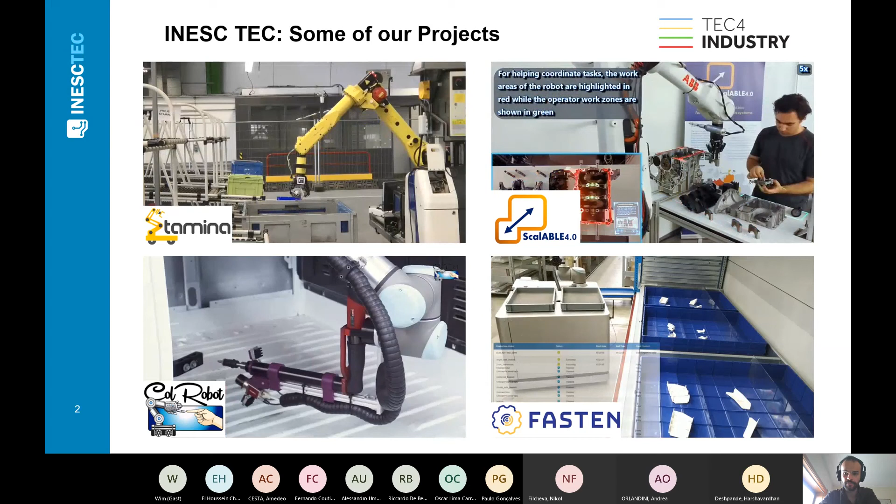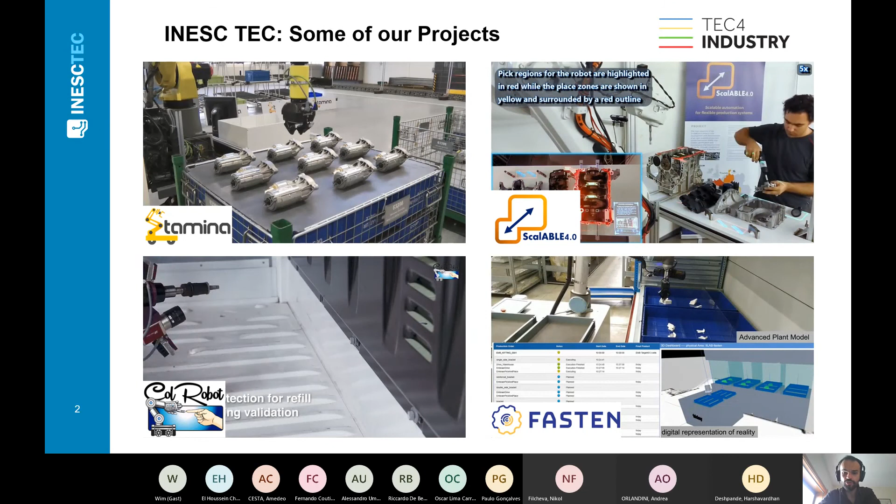Throughout the years, as I mentioned, we have worked in collaboration with the automotive sector mostly, and also recently with the aerospace sector to develop automation and robotic systems, specifically mobile manipulators to perform either manufacturing operations or intralogistics tasks within European manufacturers of these industrial sectors.

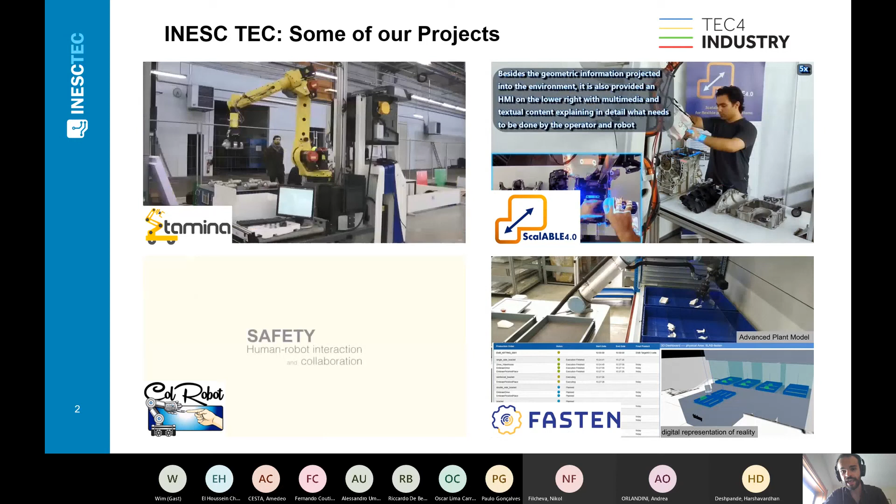And we also have put a little bit of an effort in the last few years into human-robot collaboration, and here in the videos that is hopefully being showcased in the presentation, you can see two examples of this.

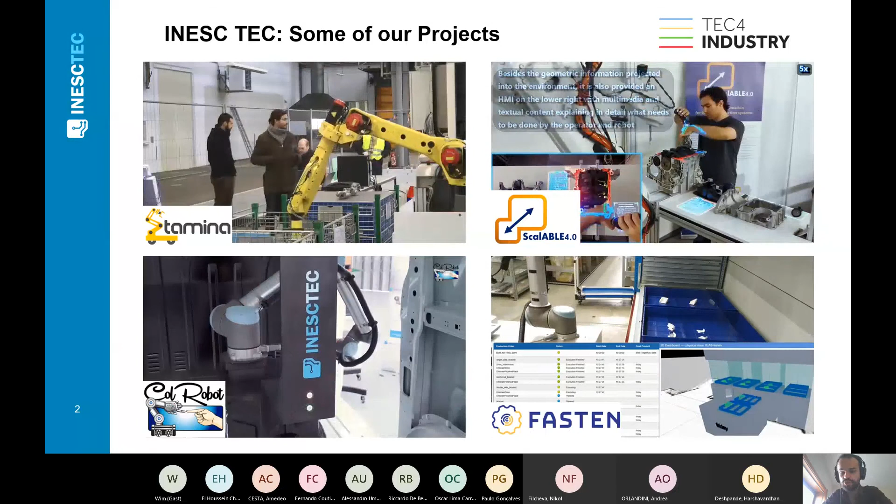On the top, we can see the Scalable project, where we developed flexible automation and robotic solutions for the automotive sector, in concrete Peugeot, Citroën, and a company here in Portugal, Simoldes.

And here in the bottom left part, we have a project which we developed for Renault in France. So it was basically a mobile manipulator to provide these assistive tasks to operators within the insides of a vehicle.

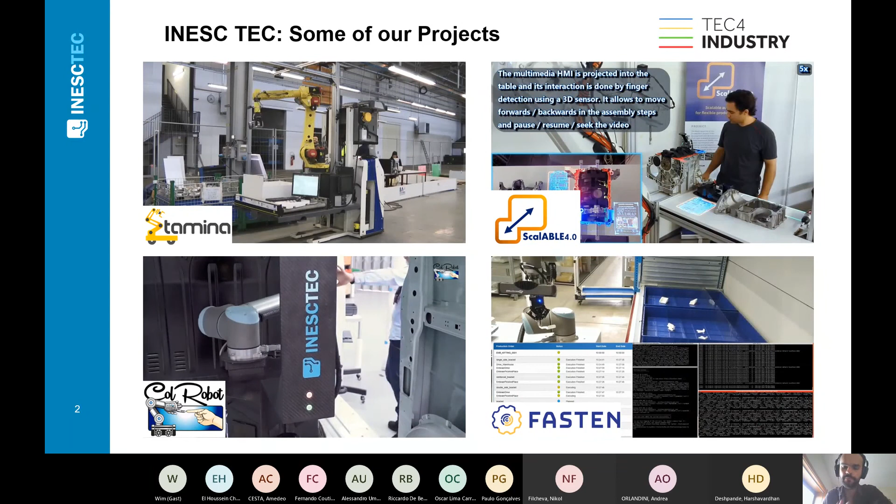All of these videos and all of these projects that I presented here have the same feature of actually featuring our ROS-CODESYS bridge, either for establishing communication between the ROS ecosystem and some kind of hardware which only spoke automation languages, or to even integrate the robots with the automation production line. And I will get to particular details in a little bit.

So going into a little bit more of the background for this development of the ROS-CODESYS bridge. So the challenge that we face as a ROS developer was the fact that we found out that many times it was time-consuming for us to develop or integrate industrial communication protocols within ROS.

Sure enough, there is already some effort and some very valuable tools within even the ROS Industrial Consortium ecosystem to provide communications with field buses and automation protocols, but we believe that there could be a more systematic way and a more efficient way to perform this kind of connectivity.

And thus the ROS-CODESYS bridge started initially as a master thesis project, but then it evolved to being this funded ROSIN initiative. And the solution here revolves around a shared memory interface that enables the communication between ROS and CODESYS, which is a soft PLC application that can then be used kind of like a relay or a middleware between the robotic world and the automation world.

So in other words, CODESYS could be responsible for communicating in field buses, so EtherCAT, CAN-open, Modbus, and so on, but also implementing connectivity and interoperability with higher level manufacturing systems, such as the features provided by, for example, OPC UA. And all of these types of communications were communications that we explored throughout the project.

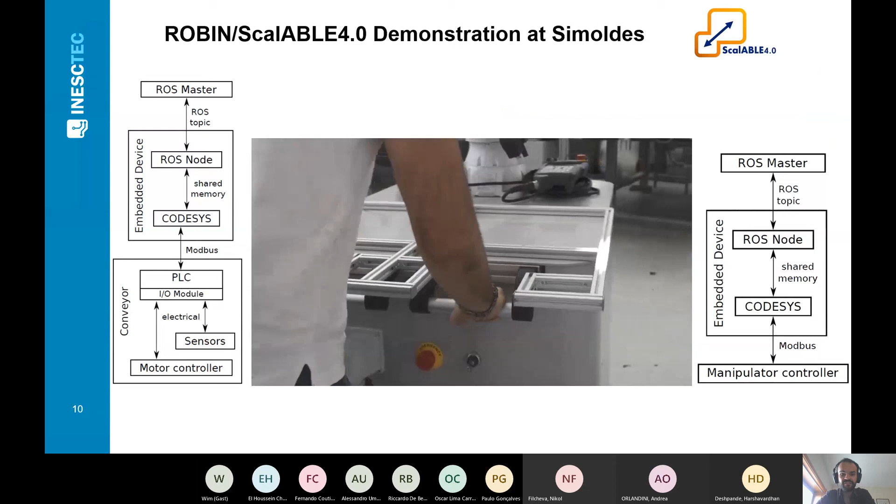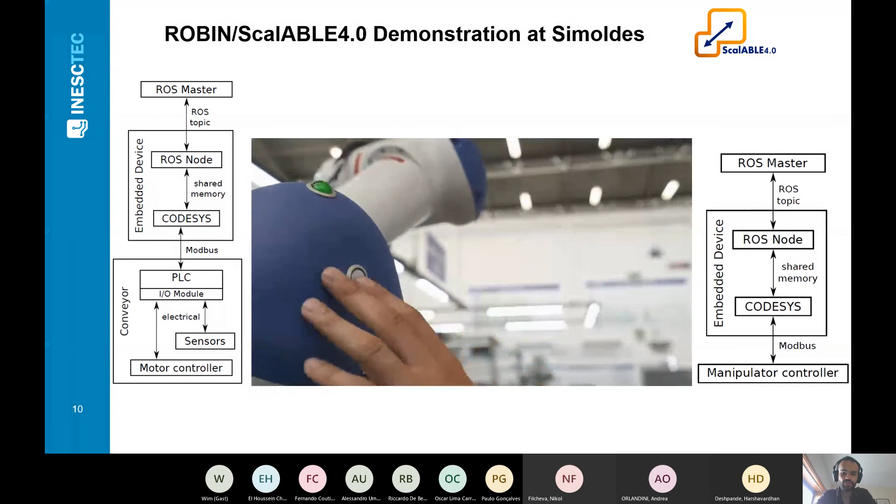Finally, here on this slide, I have a video showcasing an example of application of this software in one of our projects, specifically the Scalable 4.0 European project, which finished a few weeks ago. This demonstration was recorded in the factory with the actual Scalable 4.0 robot a few months ago.

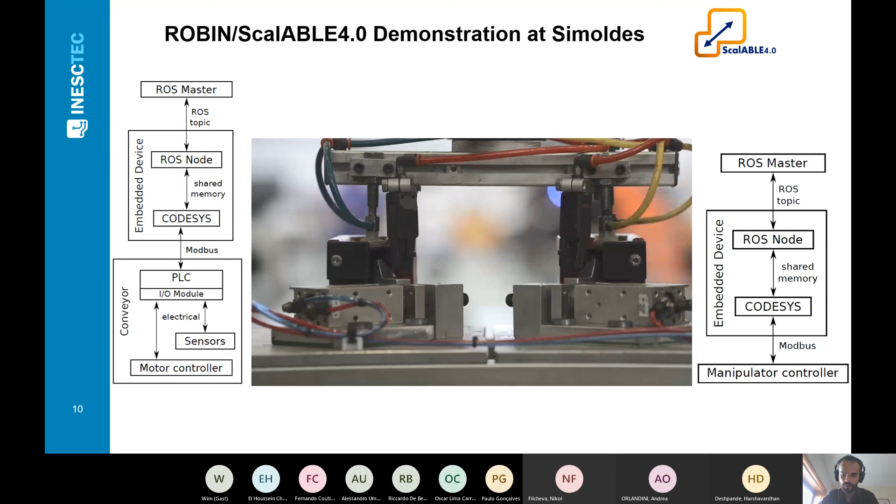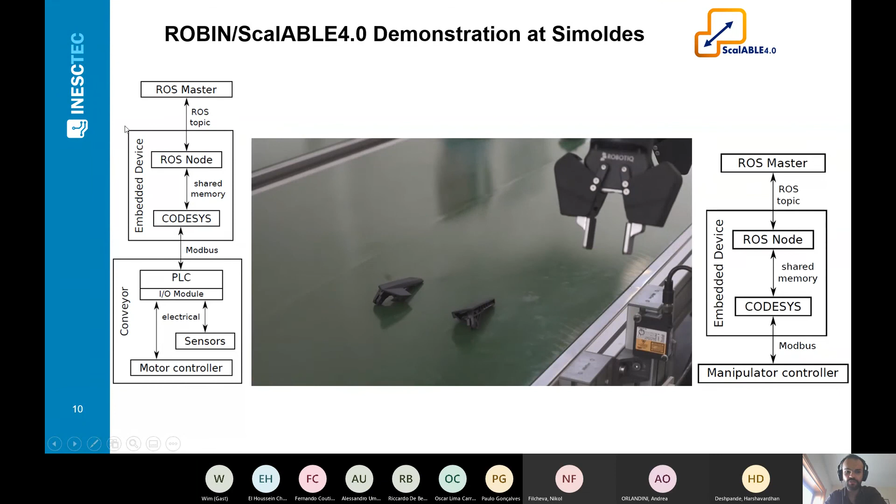We are using the ROS-CODESYS bridge for two dedicated, separate communication interfaces. The first one I want to highlight is pictured here on the left side of the image, and is related to the communication between the ROS ecosystem and the conveyor PLC.

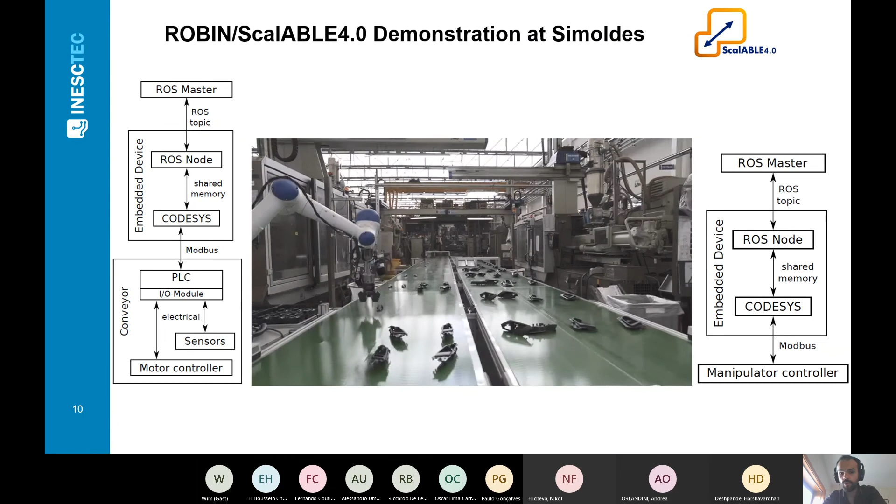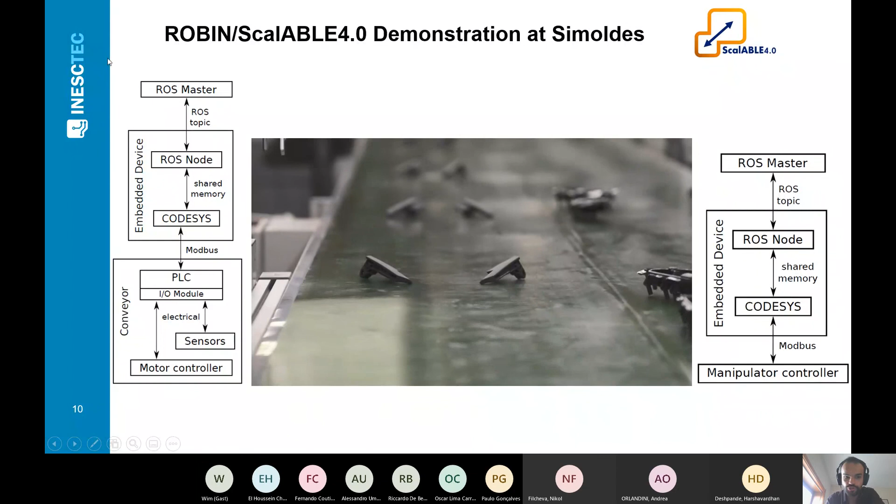In the factory, we have this dedicated multi-product assembly line where we have sensors, pictured a few seconds ago in the video, which are basically laser sensors that detect the positioning of the objects to be picked and inform the robot, through this ROS-CODESYS software implementation, that there is a given type of part at this position.

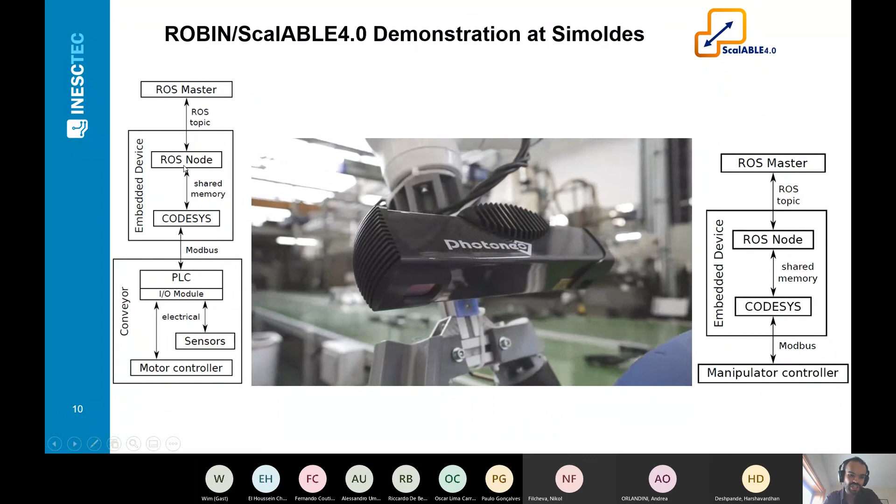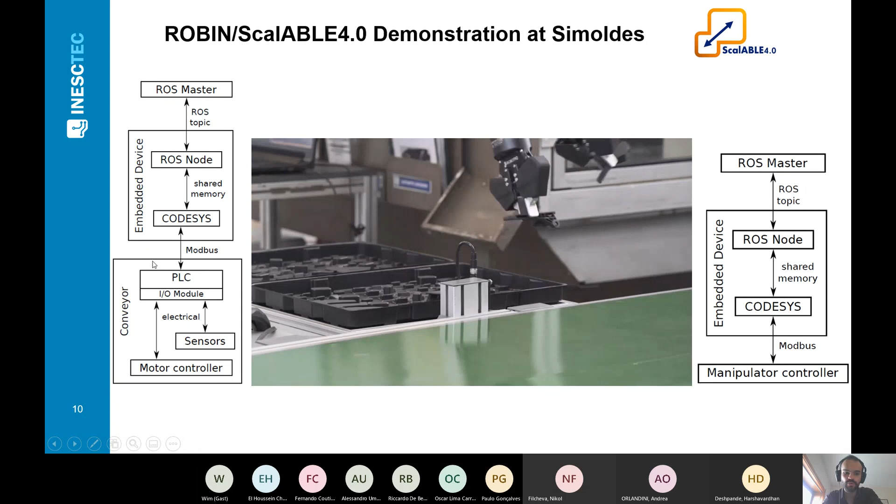The way we do this is to enable communication between the BeagleBone Black, running the ROS node generated automatically from our CODESYS project, and having this CODESYS project communicate via Modbus with the conveyor PLC, which has its own project reading the sensors and actuating the controller for the motor that moves the conveyor belt.

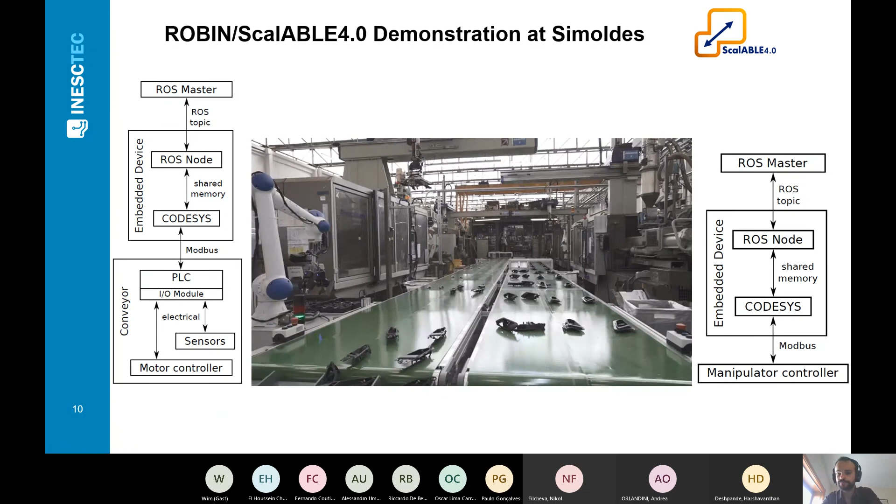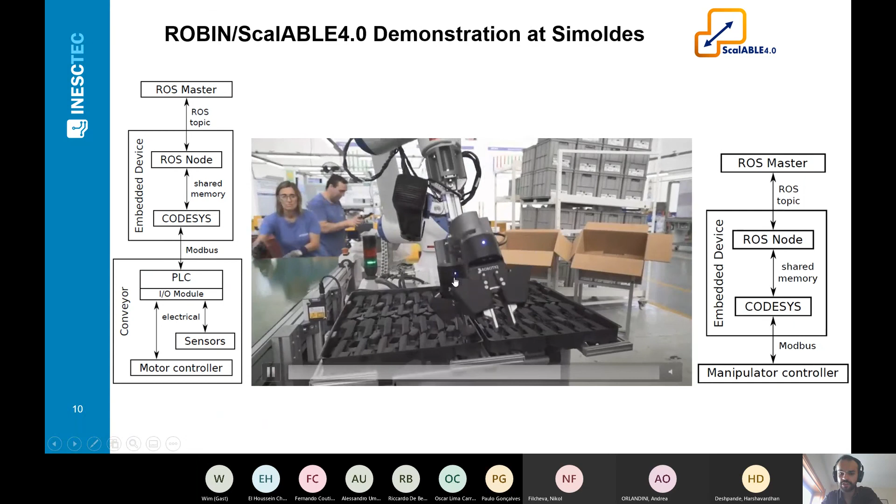The other application example running on this same demonstration is connected to the robot hardware, specifically the manipulator controller. In this instance, we are not using any interface for communicating with the controller using its ROS library, or relying on any direct software communication or interoperability means.

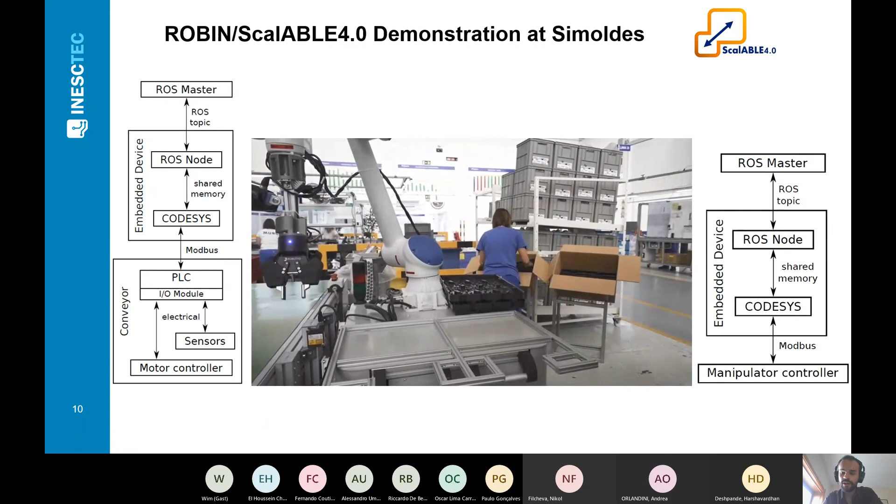What we are doing, in fact, is establishing direct communication with the robot controller through Modbus as well, to retrieve not only its position, its Cartesian position, but also to issue commands for the robot to move around.

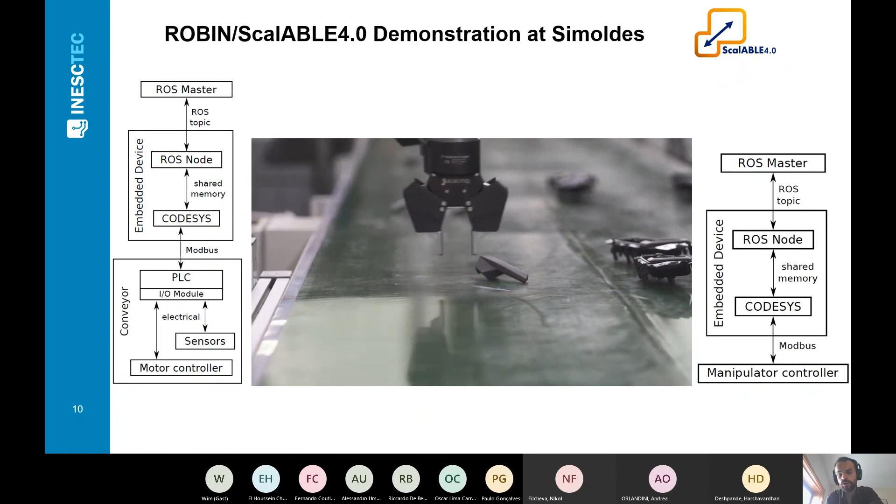In this instance, the location of the objects is computed by the vision system in real time. What we are doing is using this computed information to inform the controller of the final position of the object that should be picked. We are, of course, also relying on the ROS-CODESYS environment to do this.

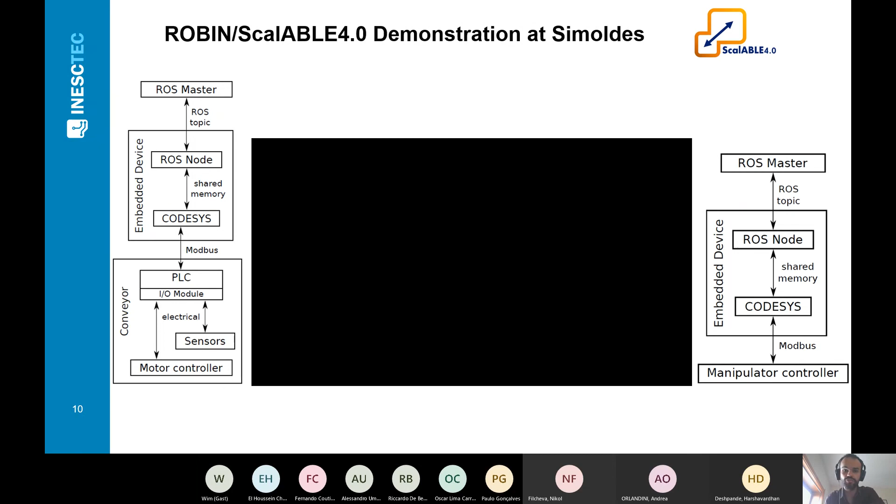It's very easy to access, and it's an open license - Apache 2.0 software, so it's open source and open license, and you are free, of course, to use it in your projects.

One thing we also do is have the software running within the CI infrastructure. We periodically check, trying to release new versions and checking its quality and test coverage. Right now, we are not at a very high mark, but we plan to improve this in the future. Also on our roadmap is the release of this software infrastructure as an official ROS package.

In parallel to that, we also plan to work on the conversion of this infrastructure to ROS-2, the new version of ROS that is already available.

Second thing, to finalize: all of this that I explained today was a very high level overview, due to the time restrictions and the level of detail one can go into in this kind of presentation.